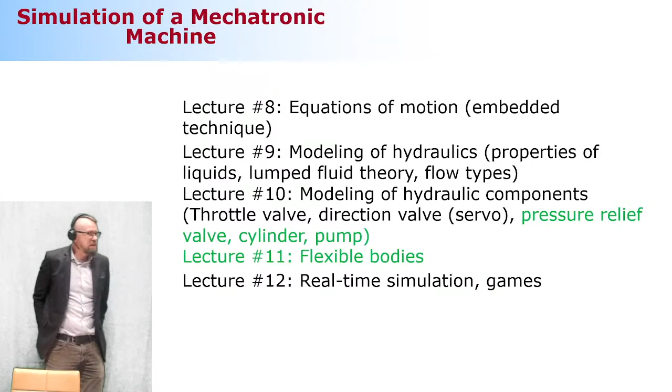I think it is pretty clear. Okay. So with that, we're gonna summarize what we discussed a week ago. A week ago, we learned that there are two different types of flows. The one that is dominating and most important for us is turbulent flow. In the case of turbulent flow, the particles are whirling. So they're not traveling in order through the orifices, but instead they introduce a certain level of chaotic behavior.

A behavior where they are rolling, not traveling back and forth, but circulating in a whirling way. Modeling-wise, the important observation regarding turbulent flow is the fact that the pressure difference and the flow rate are quadratically related. This is extremely important. There are certain parameters defining the relation between the pressure difference and the flow rate, but the pressure difference will be under the square root, meaning that's a quadratic relation. That's something important to keep in mind.

As soon as you see the characteristic curve and see that it behaves in a quadratic manner, you know that we're speaking about turbulent flow. Then the flow type that is not that common, but takes place every now and then, is laminar flow. In laminar flow, particles travel in good order, so they are not whirling. Laminar flow typically takes place when the pressure difference is small. Okay, what is small then? Roughly speaking, if the pressure difference is less than 2 bars... otherwise it's in most cases safe to assume that the flow type will be turbulent flow.

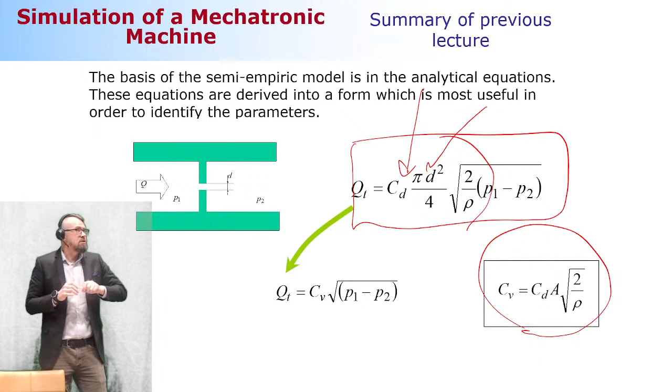The Cv is called the semi-empirical parameter, and you can get it directly from the manufacturer's catalog, because manufacturers offer characteristic curves telling the characteristics of each of the components they're selling. That's the idea. It's a combination of analytical expressions and measurements. But you do not conduct the measurements; the manufacturers will, or already did. That's the magic here, that's where the semi in semi-empirical comes from.

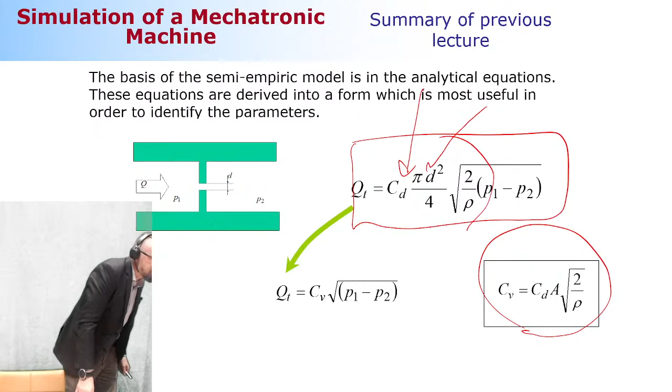Okay, that's what we learned a week ago, and we learned about the magnetically operated directional valve, a good example of how a valve component can be modeled. There are two steps. The first step is to model the spool position. If the spool is operated by a magnet, you can assume that the spool will follow the control signal, coming from the joystick or software or however you control your system, with a certain delay. To take this delay into account, you can use a simple first order delay equation, where the input signal is here, and this is the time constant, telling you how fast the spool can move from one location to another.

So we're cutting corners big time here, because we are not making the equation of motion for the spool. To do that, we would need to know the spool mass and all the forces imposed, including the flow forces, and so on. It becomes very complicated, so we don't do that. We make a simple assumption that the spool will follow the control signal with a certain delay, which is often the case for spools operated by a magnet. Okay, what then? Once we know the spool position, the next step is to model the flow through the valve.

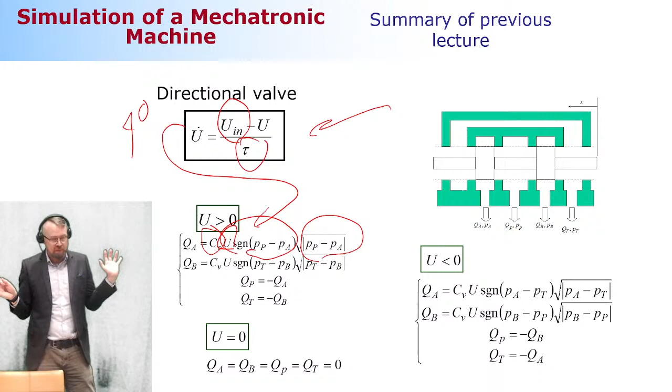Okay, and this is a scenario when the spool is moving in a positive direction. When it is in the middle position, it's assumed that everything is closed, which in real life will not be the case, because if the spool has a land like shown here, there will be a certain amount of leakage, and you will be seeing the leakage when you put this in a middle position, and then this is what happens when the spool is moving in the negative direction, so that direction.

Okay, then we learned about digital hydraulics. Digital hydraulics is a way to control the flow and pressures by using a large number of on-off valves. And the on-off valves are poppet valves, so they can only have two positions, fully closed or fully open. So it's not like a spool that can take any place you want inside of the spool housing. Now it's just on or off. And when you have a number of these on-off valves, you can get the same kind of features and even better than you can get from conventional valves.

Why? Well, it's mentioned that there is no leakage. That I can admit, there is no leakage, as is the case with conventional spool valves. They said that it can be more energy efficient. That needs some kind of clever control in a pump to make that happen, but yes, it's possible to achieve it. And what else did they mention? I think one drawback is that it's quite a bit of thinking, because to control this number of on-off valves, you need to make a clever control scheme.

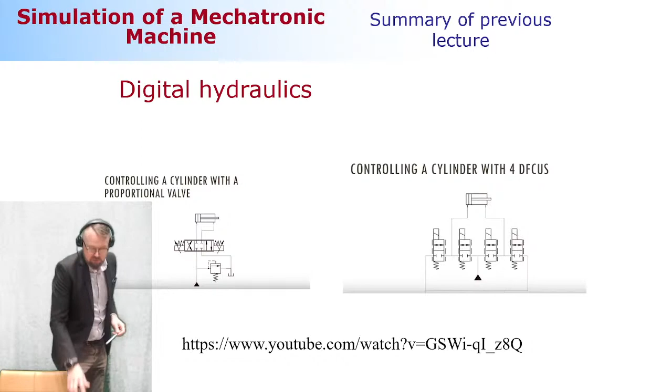Okay, so that's about the summary. We're gonna cut the corners here a little bit. So we're gonna forget about the pressure relief valve. I'm gonna give it as a reading assignment. This is gonna be available in the lecture notes. This is one of these bit more advanced components, but let me just give the highlights to you, and then we will move on. And we're gonna go to the next topic, which will be a cylinder, and the final component will be a pump.

Okay, you're still alive, right? Okay, very good. So why is it that you don't want to interact with me today? Because I look scary? Because of my new haircut? Okay, so let me tell you what happened. On Saturday, I went to the local barber shop, and we don't share a common language. I tried to explain to take just a little bit off, and he said, "Yeah, sure." And I came out like this. But he's a good friend of mine. We just don't have a common language. But other than that, it's good.

Okay. And what about my dress today? Why is it that I'm looking different than usual? Would you like to learn that too? So earlier today there was a former, well, he got his degree from this university already, I don't know, 35 years ago, and now he's a big shot officer in the industry. So he was making a visit, and I tried to please him as much as possible. So that's why I even put some effort into my hair and the way I look. Okay, so that's about it.

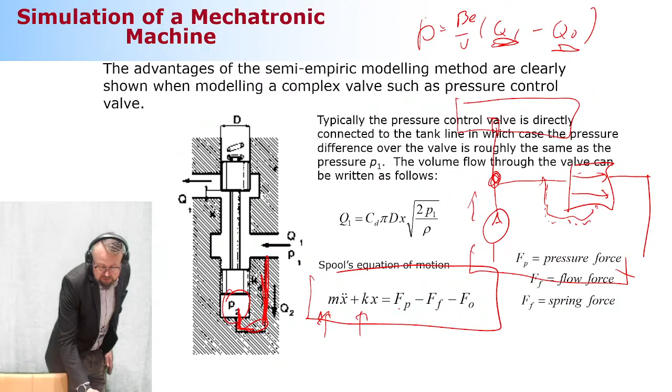But I was here, so I was explaining the equation of motion. The parameters needed here: you need to know the mass, spring, and many different forces. Once you know that, this is how the flow through the pressure relief valve goes. Now there's a lot of parameters - a big headache.

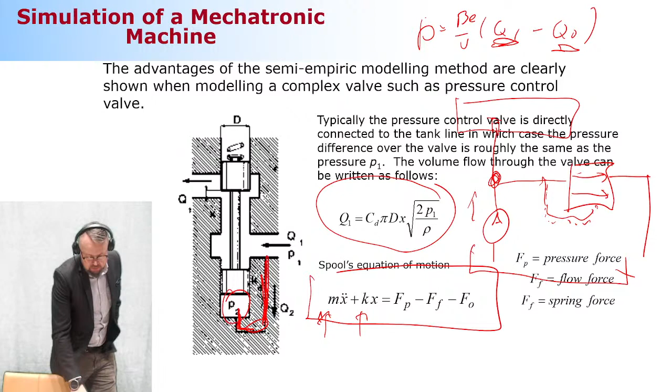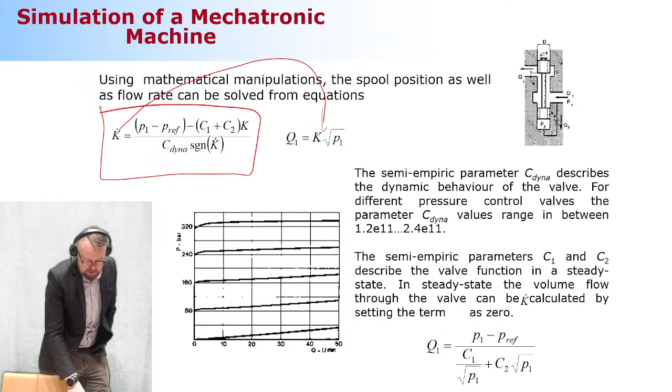How can you model a pressure relief valve? Details will not be shared here, so you can take a look at this using the lecture notes. I'm going to move on to the next topic, and that's a cylinder.

Very simple component - it's converting hydraulic pressure to mechanical force. To do that, this is a two-way cylinder, meaning it can be pressurized here in the piston side and here in the piston rod side. It works in a way that pressure applying here in the piston side will be multiplied by the corresponding cross-section area.

And that is minus the pressure that is fighting against it, because this pressure tries to press the cylinder in the left-hand direction. So there is going to be a pressure P2 multiplied by the corresponding cross-section area. That's going to be your force produced by the cylinder.

But there's one more component in this equation, and that's going to be a friction force. The friction force takes place because of the sealings that are used to make sure there's no flow going through this piston here, and no flow that takes or comes off from the cylinder.

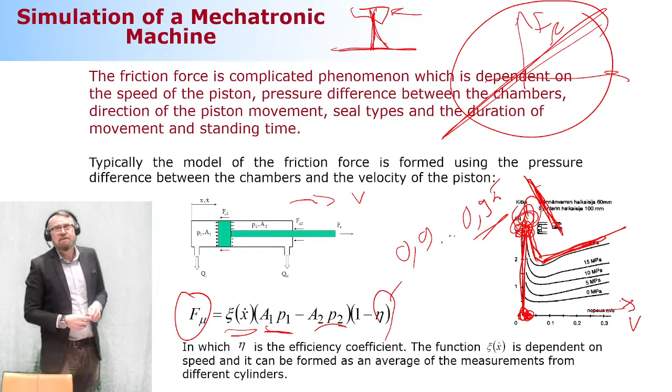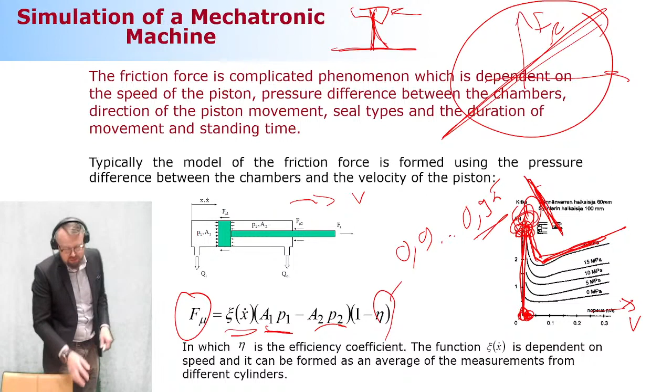But you knew this already. You knew it. All clear. Okay, why didn't you mention that you know this, or did you figure this out already a while ago? Okay, anyway, let's move on.

So pump will be the last component, and then there's going to be an example, and then we're done.

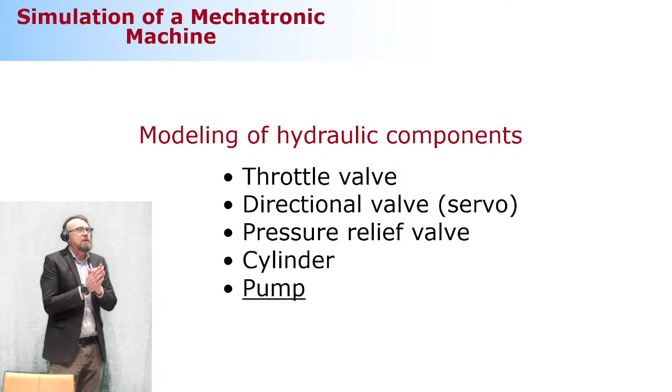Okay, the pump is a component that we assume produces flow rate. You know, flow and pressure is like chicken and egg—one will happen first. We make an assumption that the pump produces flow rate, and pressure, in turn, takes place if you're resisting the flow rate. But if you don't resist the flow rate, there will be no pressure. That's how it is.

And again, remember this equation? P dot equals effective bulk modulus divided by volume, times flow rate in minus flow rate out. Again, if in and out are not the same values, if you're resisting outgoing more than incoming, pressure starts to increase. That's the mechanism that is assumed to behave.

So what we're going to do when speaking about the pump is model the flow rate. That's it, nothing else. So it's the source of the flow rate, and resisting it gives you the pressure. That's the mechanism behind it. Now, again, we're going to use the semi-empirical approach like always, to figure out the parameters that otherwise would be difficult to get. Nothing else.

There are many different kinds of pumps, but pumps can be categorized into two big categories: fixed volume pumps and variable volume pumps. The difference is that fixed volume pumps keep producing flow rate no matter what—they have no understanding of whether or not the flow rate is needed. They just keep producing it, and they're used often because they're considered the most reliable type of pump. In certain industrial applications where there's no significant need to control, the fixed volume pump is a good choice. But more and more, the variable volume pump is being used.

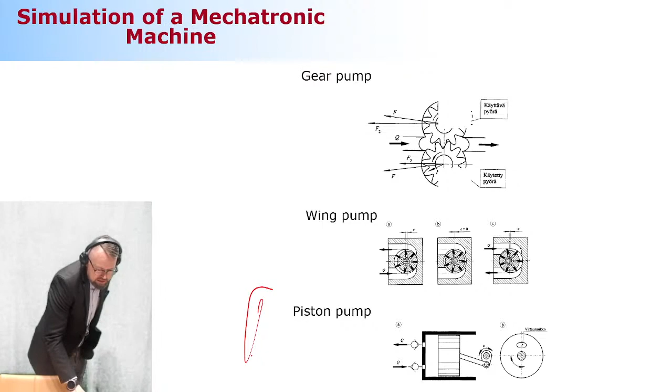I'm going to take a look at the comments from the chat window pretty soon. These are the different types of pump—piston pump may be the one most heavily used. Now, two categories like I mentioned: fixed volume pumps and variable volume pumps, and that's it.

First we'll take a look at fixed volume pumps. This is very, very simple, no serious thinking needed, because we're going to use this simple equation: power equals flow rate multiplied by pressure. Same as in electronics, kind of the same as electronics. Flow rate multiplied by pressure—that's your power.

Now, the pump is operated by a motor which has a limited amount of power, and this is the way to model the fixed volume pumps. The way we can do it is take this equation and take mechanical efficiency into account—how much of this mechanical energy can be converted into hydraulic energy.

That's the mechanical efficiency number. By taking that into account, that's your equation to define how much flow rate a fixed volume pump can produce. You simply take this Q, solve it from this equation, and take the efficiency factor into account. That's your equation, with one limitation: there's a mechanical maximum due to the construction of the pump that it can produce. Taking this geometrical limitation into account—this maximum flow rate it can produce—that's your equation.

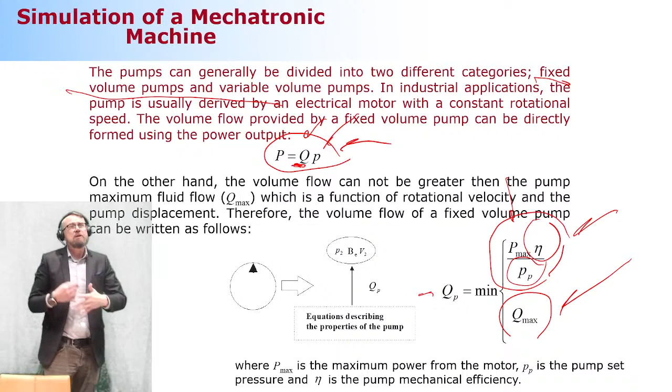So what do you do then? You substitute the information about how much is the maximum power that the motor running the pump can produce, and the pressure right after the pump. That's one term, then you compare it to the mechanical maximum, and select the one that gives the smaller value. That's it. This, as mentioned earlier, is typically connected to a pressure relief valve to make sure the pressure doesn't increase too much. That's a typical combination.

Variable volume pump. Remember, in the modeling of a pump, the pump is assumed to produce flow rate. Why do I say that? Because what you're going to see momentarily is in-class quiz. So pump is producing what? Flow rate. Okay, so it's a flow rate that it is producing.

Then variable volume pump, now things become a bit more complicated. We're going to use, in this semi-empirical modeling approach, a first order delay equation, or differential equation to be more specific. What I have in this first order differential equation is Q dot, which is not what I want, but I can solve for the one that I want, which is Q.

Now this Q is proportional to the pressure difference between what you wanted to have and what you have. If you have the pressure right after the pump, you don't need to produce any more flow rate. The flow rate that is currently produced is this, and this is how fast your pump can react to different situations.

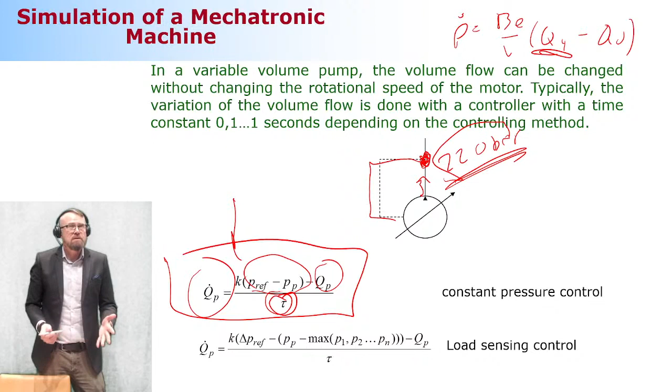Simple like that, because remember, this equation that I've written on each slide today: Q in, Q out. As soon as this reaches the set value, you do not produce any more flow rate to this control volume. You're adjusting the mechanical dimensions of your variable volume pump, and that will do the job for you. The parameters needed are this time constant and K, which you can get from the manufacturer's catalog. There's an example momentarily, and a detailed explanation in the lecture material too.

Load sensing pump. Have you heard about that? So you know how that works? Would you care to hear this one more time? Okay, so some of you know what's the deal with load sensing pumps, others have never heard of it. Or have you?

Okay, the load sensing pump is an extension of the variable volume pump. It too is a variable volume pump, so it can control itself to different scenarios, but in a more clever way than constant pressure control, because constant pressure, as the title says, just makes sure there is a constant pressure right off the pump, nothing else. But this is still energy-wise may not be the most clever way to behave, because sometimes you need quite a bit of reserve in your system, sometimes you don't.

What you really want to do is sense how much extra or reserve energy is needed in your system. You can measure that from actuators, and the typical actuator is a hydraulic cylinder. You take pilot lines, sensor signals right next to where the cylinder is operating, on the piston side and the piston rod side, checking what the pressures are at the given time in those locations. Then you adjust your pump based on that information. You take the highest pressure into account, and make sure that this highest pressure plus a predefined pressure difference, maybe 50 bars or something, will be in use. So when you need it, you have it, but you don't do it excessively, so you don't waste energy. That's the idea. It's very much used in mobile hydraulics.

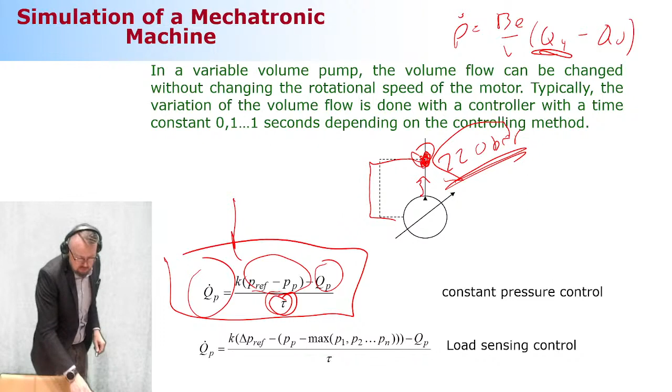How much did you understand from that explanation? Zero, right? Okay, so let me explain it using another kind of drawing and try again. There's also an outstanding YouTube video we'll take a look at momentarily.

Let's take a look at the video, and then I will explain a bit more.

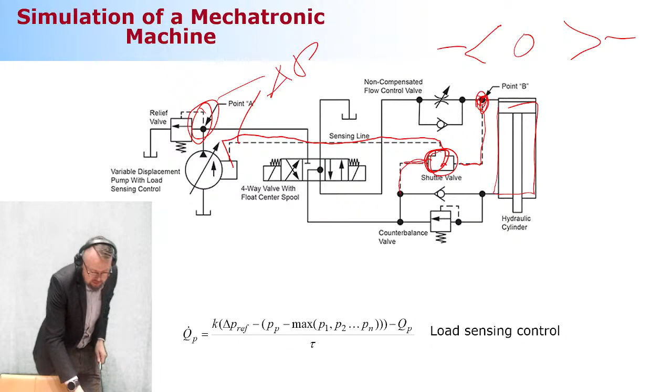Welcome to Lunchbox Sessions, bite-sized industrial training. Why this is not... Hey, it's Carl here from lunchboxsessions.com. It was okay. This will be a brief introduction to load sensing pumps, just a second, sometimes referred to as flow compensating.

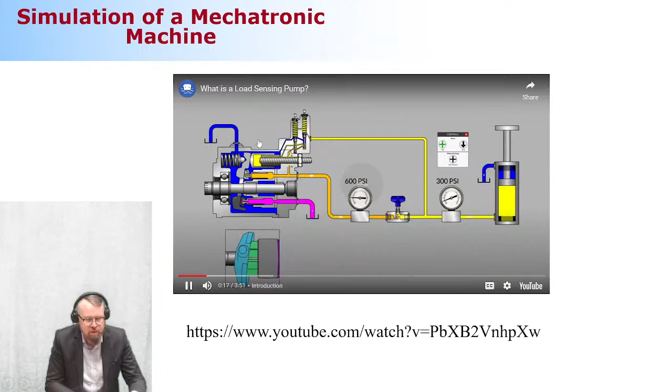Where this line goes now? Speakers. Should go to speakers.

Welcome to Lunchbox Sessions, bite-sized industrial training. Hey, it's Carl here from lunchboxsessions.com.

Big headache. Okay, this one. You see it now? What? You don't see it yet? You see it? You see it. Okay, let me just make this a bit bigger because I don't want to go back to the presentation mode anymore. Okay. Load sensing.

This will be a brief introduction to load sensing pumps, sometimes referred to as flow compensating. Our pump still has that very heavy spring, that major adjustment called the pressure compensator or the pressure cutoff for when we hit that really high top end pressure to make sure our system is protected. But it also has a weaker spring called the load sensing adjustment or the flow compensator.

And that flow compensator is receiving information, feedback if you will, coming directly from the load, our cylinder, which right now is working at 300 psi. That's the pressure it takes to lift the cylinder and rod. And that 300 psi is being fed back to the controller and giving that spring a boost. I could tell that the spring is actually set to 300 psi. How did I figure that out?

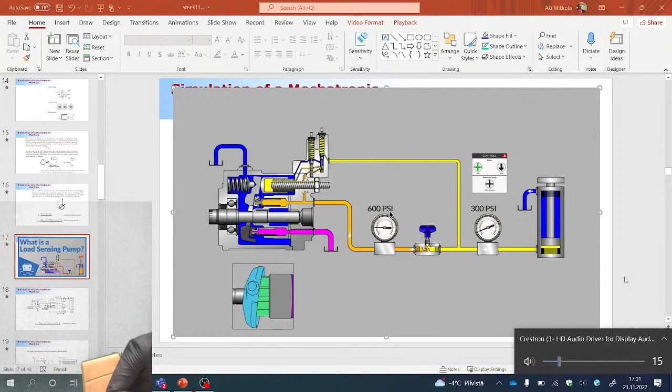I figured that out because our pump outlet pressure is set at 600. So it's taking 300 from the load and adding it to the 300 spring setting, and those two forces add together to give us our regulated pump outlet pressure of 600 psi. This is different from a pressure compensated pump, which might be set at, say, 2000 psi at all times, and therefore using a lot more input energy.

So in this particular case, we've got a pump that sets its outlet pressure just slightly higher than what's needed by the load. We've got to have some kind of a flow controlling device in there. This is our needle valve that's being used to set our desired cylinder stroke speed. But let's have a look at what happens when I add a brick to the brick stacker.

Our load pressure has gone up to 600. But what happened to our pump outlet pressure? Somehow it automatically adjusted from 600 up to 900. What we're finding out is that we're always maintaining a 300 psi pressure differential, sometimes referred to as a 300 psi margin pressure when we're referring to load sense systems.

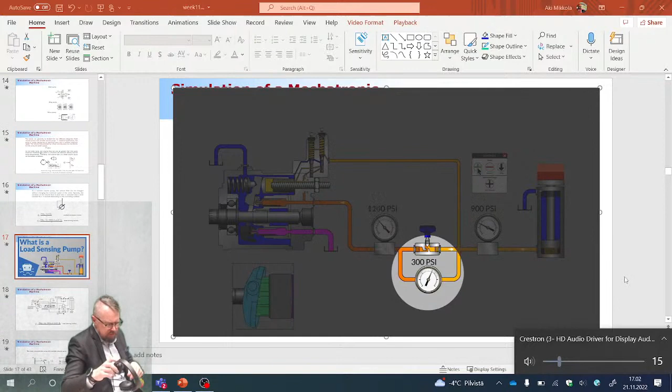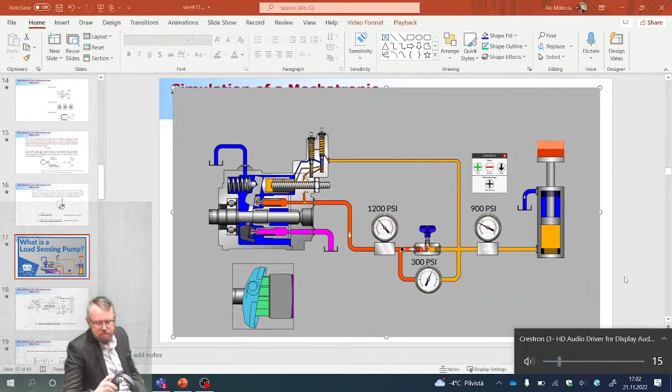Let's add one more brick, and this time watch the delta P gauge. The delta P gauge fluctuates for a brief fraction of a second, but quickly we find it returns to 300 psi, and we never really noticed any change in speed at the cylinder. The cylinder just kept moving nice and steady, and our pump found out that it needed to increase the outlet pressure setting automatically.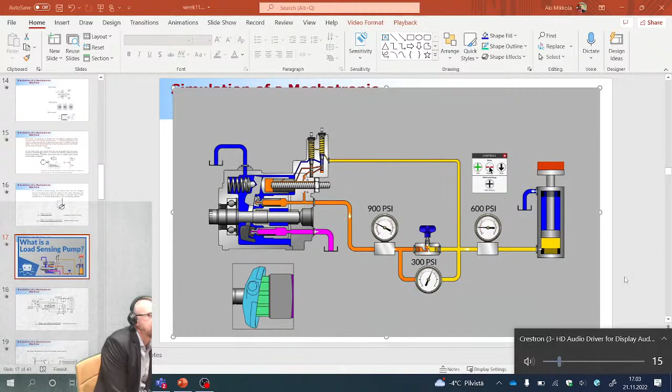So what we found out is we can have a pump that is set at a pressure that's just a little higher than what's needed at the load, instead of being always at the pressure cutoff pressure, which could be considerably higher. And because we want steady speeds to our hydraulic cylinder, we don't wish to see any fluctuation in speed. Every time we take a brick off the stack, or add a brick to the stack, the pump knows to adjust itself accordingly so that the flow rate through the needle valve doesn't change. That's the nature of a load sense system. And that's a brief introduction to load sense pumps.

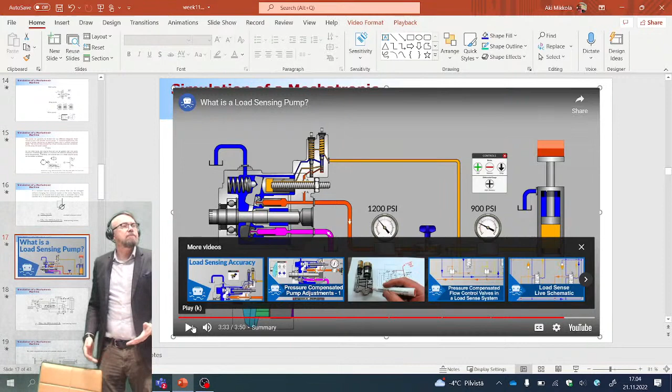Clear, pretty clear. Okay, and I got the comment from an online participant that I used incorrect terminology, because I think at some point I say fixed flow, so it's a fixed displacement, and that's what it is. So fixed displacement, because the displacement, the mechanical dimensions are unable to change. All right, thank you very much for that.

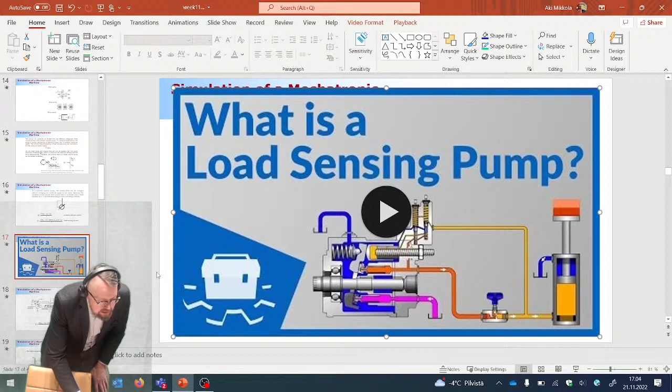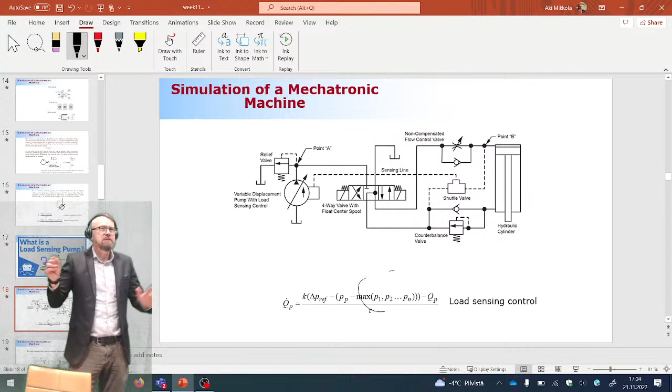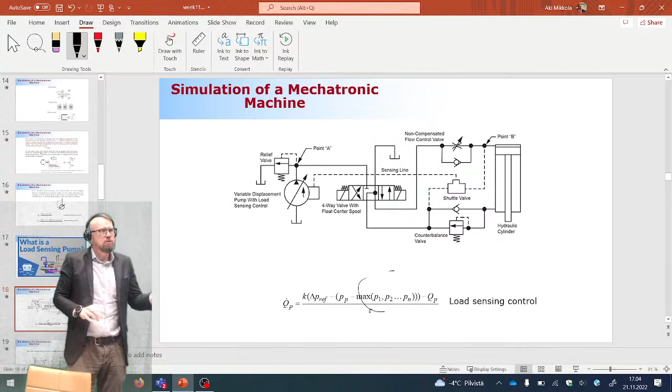And now comes the next challenge, and let's see how well it works. I think that I will go like this, because this is what we discussed already. So in load sensing, you can have more than just one actuator you're monitoring. And based on that, there is one cylinder that is asking for the bigger margin, that's what this guy was calling margin pressure. You are controlling your pump based on that. So it's always the highest pressure that is used to control the load sensing pump.

The key parameter can be obtained from the manufacturer's catalog, like it is shown here. So these are one of the important features that are offered by a manufacturer. But my first in-class quiz is coming right next. So in hydraulic modeling, a pump is assumed to produce what? Pressure for a hydraulic circuit, oil flow for a hydraulic circuit, temperature for a hydraulic circuit, voltage to an electrical circuit.

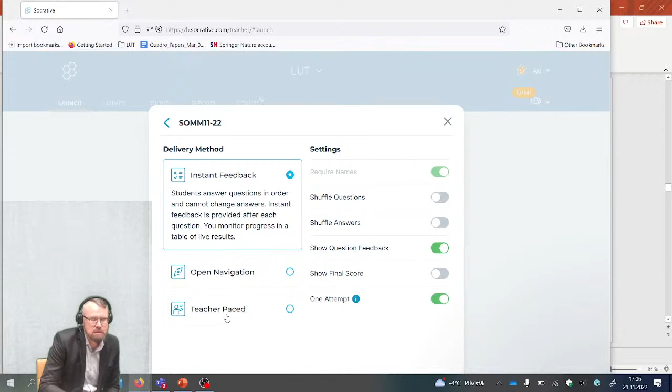And not yet, so it's not yet on, but let me, sorry, I haven't logged into Socrative, so it's going to take me a couple seconds to do so. So you guys want to have a break, or you will take a break no matter what. Okay, so let me launch. They have a different visual interface than usual. Okay, so here it is.

So in hydraulic modeling, a pump is assumed to produce what? Pressure, flow, temperature, voltage. Those are the options. And then what follows is that I'm going to spend a little bit of time to introduce one example related to hydraulic circuit modeling. And once I'm done with this example, then we're going to discuss how to describe mechanical deformation in multi-body applications.

Room name is not mentioned. The room is LUT, as usual. Oh, the Socrative link. I don't know how you can get the link. I guess you just type Socrative into Google and it will take you to Socrative. Okay. What else? Yeah, there was one more comment about digital hydraulics, that more components, less reliable. I mean that you have more problems. Yeah, could be, could be. Okay, so let me take a look. Oh, we got 44 answers so far, so I'm hoping we're going to get more than that, up to 60 something, that I think is roughly the number that will make me happy today. But we'll see. Oh, 50 answers already, and the number is increasing.

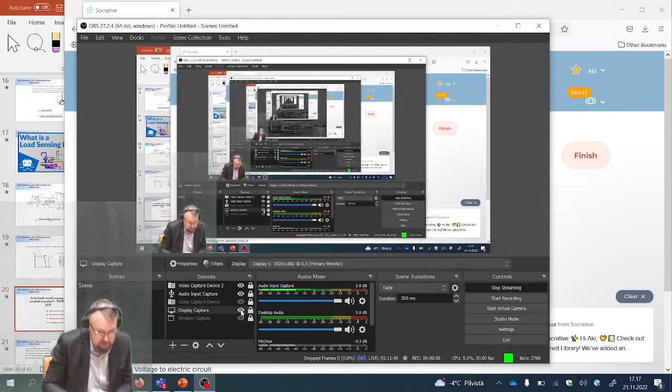So where is it? Here and this one. How is that? Okay, so here's a little bit of sad news. So we only have here 57 students, but how is going to be the success rate? So game is on. 100? No, I would say 50. 50. 70. Well, it could be 72, but my guess is 50. So 50. So what are the others saying?

So the numbers are coming, and the numbers are like 87, 98. That's a big number. 99. 99. What about 100? So why not 100 then? It could be 100 too. Okay, so now they finally came to 100. So let me close in 5, 4. Yeah, I'm not gonna do this counting because last time I did the counting, you guys scored 100%, and that was a big, major disappointment to me. So it wasn't even a very close case.

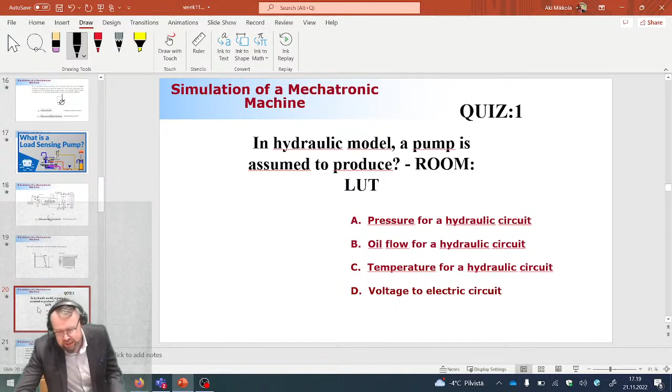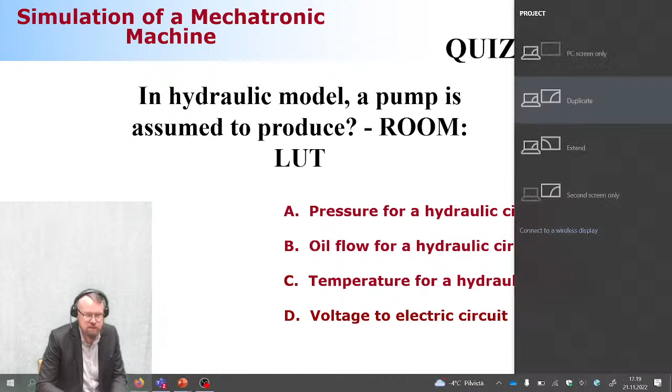So oil flow is the one that it is producing, not the pressure. This is a modeling agreement we made. You cannot see. Sorry about that. Okay, so online participants, they can tell you that the success rate was at 86. 86. Now let me check. Now it went in the wrong order again. So I need to do this and then this. Okay, and then one more thing, which is this. Duplicate.

All right, so here comes the example that I mentioned. And in this example, there's going to be another in-class quiz, so the second in-class quiz will come momentarily. So I have here a very simple hydraulic circuit. It consists of a cylinder, this guy here, a direction valve, and then the pressure source and the tank. And the direction valve is connected via a throttle valve, so there's one component here, to the piston side of the cylinder, and then the piston rod side is connected to the valve as well. So this is how it is.

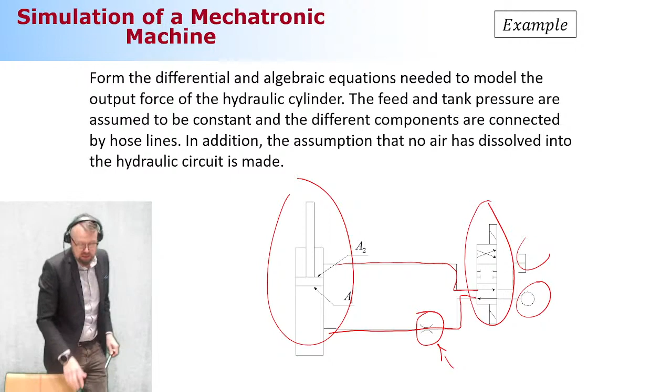So let's create the equations needed to model this kind of hydraulic circuit. First things first. The first and most important step is that you need to make decisions about how you are discretizing your hydraulic circuit. Where are the places you need to compute the pressure? So it's all about where you can assume the pressure to be equally distributed. All right? Hose lines. We make an assumption that within the hose lines the pressure is equally distributed because we will not take the pressure waves into account.

So meaning that there is a hose connecting the direction valve to the throttle valve. In this hose line, there's one single pressure we're computing, and that's it. Then this throttle will introduce a pressure drop, and because of that, I need to make another computation right after it. But now I can assume that the pressure right after the throttle valve will be the same as the pressure next to the piston. On my way back, I will take my connection, the volume in the piston rod side. This is connected to the valve, and that's it. Just the one volume needed.

One more very important decision you need to make, and this is the decision about the positive flow rate directions. You can do that any way you want, but it's highly recommended you do a drawing for it. And once you have a drawing, you can be consistent. If you keep something in your mind, it can get disturbed, and because it can get disturbed, you can so easily make a sign mistake. But once you have put it in writing or in a drawing, as shown here, then you do not make this mistake so easily. You need to do it because you need to know what direction you are assuming to be incoming and what direction you assume to be outgoing.

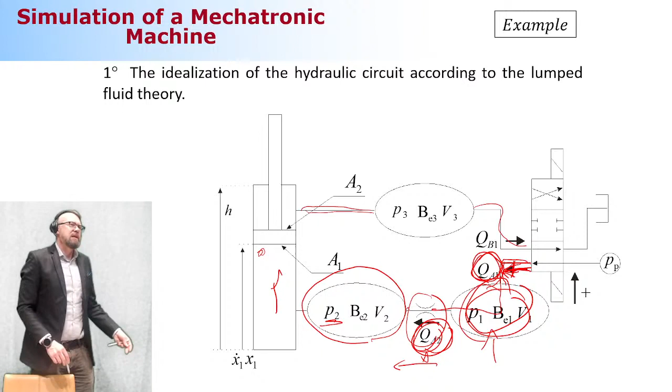Here, obviously, this is incoming, this is outgoing, with respect to this volume here. Whereas in this volume here, this is in turn incoming, and the direction here is outgoing. That's what defines what sign you need to use. One more time. So here, there's a lot of drawings. Here, this flow rate is incoming because I'm making the assumption that the positive direction is from right to left. This is outgoing because it's assumed to be the same direction as the previous flow rate. You can make it differently. It doesn't matter how you do it, but you need to be consistent because with neighboring volumes, if you make mistakes, the pressure will unrealistically start to increase and never come back. It will go sky high or it will drop to the minus, and again, it will never come back.

Okay, that was step number one, the most important. The rest is mechanical, simple. So you create the equations for the volume sizes. The first volume is just a hose line, nothing else. The second is a hose line plus whatever the piston is traveling with respect to the bottom of the cylinder. The third one, hose line, and then you take the piston rod side volume into account. Very simple.

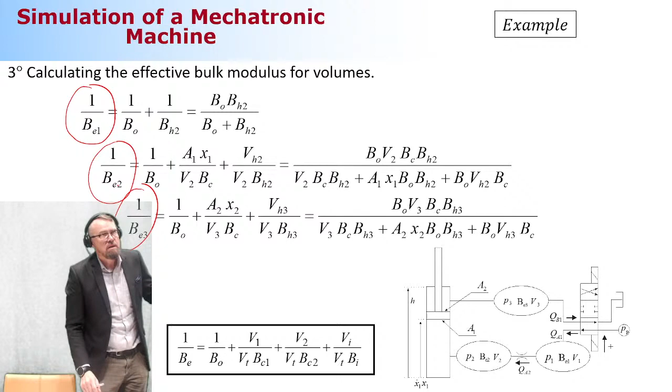Then effective bulk modulus for each of these volumes. So you need to compute a total of 3 different effective bulk moduli. So that's how you can do it. I'm not going to go into the details. It's another mechanical thing you can do. You can do it.

Then pressures. Here is the second most important thing. So you're creating the differential equation to compute the pressures for these 3 volumes, because you have 3 volumes in your system. Okay, the first one, we will get back to that soon. Second one, this is assumed to be incoming. So it needs to be positive in sign as it is shown here.

Motion in the right direction is taking volume away from the control volume. So it needs to be minus in sign. When the piston is moving this direction, that's a positive direction. When that happens, it compresses flow here. So it can be considered as a positive flow rate to my control volume 3. Whereas the flow rate, which is shown here, is leaving. That must be negative. Okay. You got the concept. You got the plus and minuses, how it goes.

You need to do something. You need to do this or you need to do that. You sure? Because your head is doing this, but your face and your eyes are doing that. So it's clear?

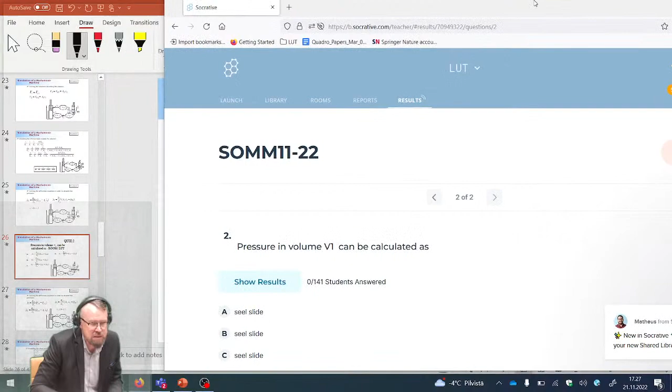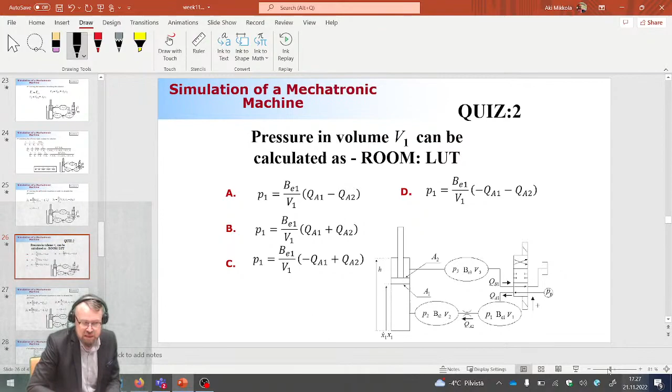So momentarily you will see, okay, where is my browser here? So let me take myself to the next question. And we only have 2 in-class quizzes today. So now I need to go back here because otherwise you will not see it. Okay, just a second. Not yet. Okay. Would you like to get my consultation or you're okay? If you wanted to discuss with me, I'll be happy to do so. And I will be willing to step off from the camera too, and willing to mute myself. So what is the correct one? I got some comments from online participants. And the game is on. What is the success rate here? You guys need some more time, or are we okay to continue?

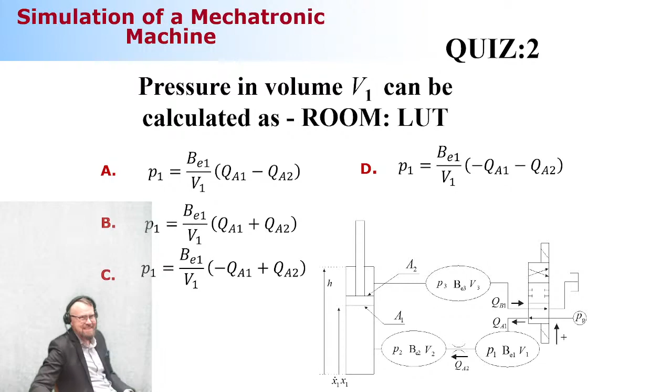Okay, now there is a question. There's cases about the success rate like 110%, 100%, 93%. I would say the 93 would be more close to reality rather than 100%, because 100% is not going to happen. It happened. I know that too well. Okay, so can I go? Okay, so I'm going to skip that because the right answer was visible, so I'm going to go back to that slide.

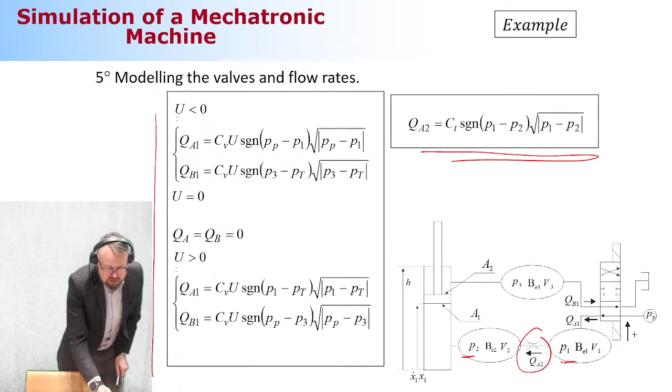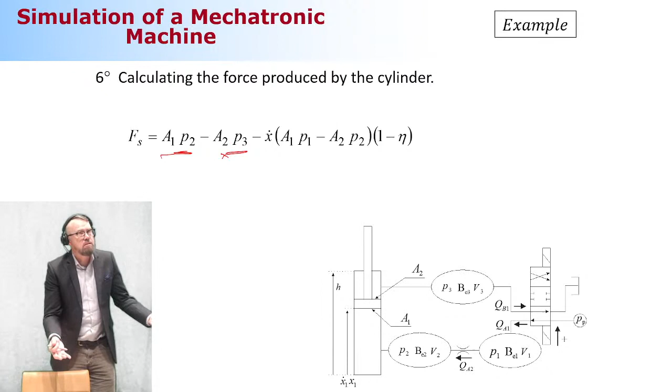Modeling the valves and the flow rates, that's going to be my next task. So we have 1 directional valve and 1 throttle valve. Each of these valve components we have discussed earlier. So this one here you can compute when you know this pressure and this pressure, using this simple semi-empirical equation. And the valve position, you first describe the valve position, and once you know it, you're using these semi-empirical models to describe the flow rate. And then finally, the force produced by the cylinder. So once you know P1, P2 and P3, that's all you need to know. And that's about the hydraulics.

Next, I think 20 minutes, I'm going to spend to give you a short introduction to flexible bodies. Why? Because a couple of years back, we professors received a letter from the student union. The union was unhappy that professors are not explaining enough what exactly they do in their research, and they were hoping that students will get more involved with the research we do. So you asked this. It wasn't me, so it was you. So now, to make the student union more pleased, I'm going to tell you a little bit about how we can model flexible bodies in a multibody framework. And we'll see how much you're going to like it. This will be the subject matter that we will revisit in a course entitled Simulation Laboratory Course, which, by the way, is the best course in this university.

Guess who is a lecturer? Correct. So it's going to be me. And I enjoy that course big time because it's more laid back than this one. It's not as tightly scheduled as this one. This is an unpleasant course in the sense that we're a little bit in a hurry all the time. So I'm unable to tell my stories about this and that, which you may not like so much, but I like it big time. All right. So it's the best course in my mind, if I can clarify the situation a little bit. All right.

Okay. And then they're saying flexible body, so that's dancing me. Yeah, it's not going to be dancing me because I'm not that flexible. But let me take myself back to, you don't see it now, but soon you will. Duplicate. Is it coming? Yeah, there it is.

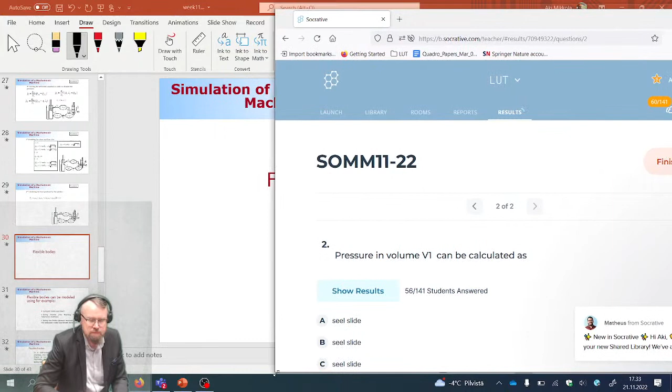Okay, I want to show you this success rate. The success rate of this particular question now is going kind of a weird way. Okay. Where is this? Oh, there. Okay, 84. It's good. It's really, really good. And let me take myself back to that. So this was the question I was asking: what is coming in and what is leaving? So obviously, this one is the correct answer.

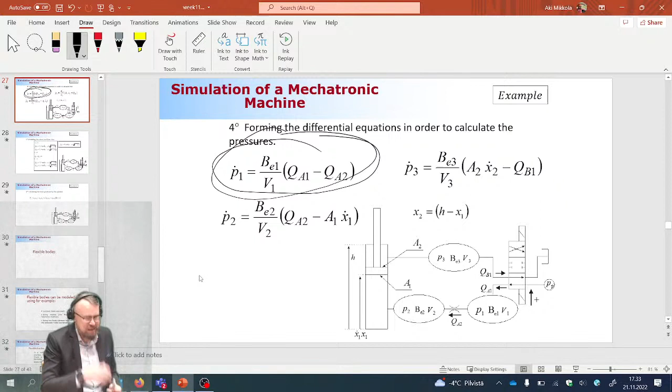Okay. Anyways, back to the flexible bodies. As we're kind of running out of time, I might continue a little bit about the flexible bodies next week, Monday. But the flexible bodies, if you take a look at the publications made by my team at LUT University, really many of them are related to how to describe mechanical deformation in multi-body applications. So the research is related to a method called the finite element method. Are you guys familiar with that? Okay, that's what we do. That's a good part of our daily dealing.

We also do real-time simulation, deformable ground modeling. We're combining artificial intelligence with simulation and many other things. But the main body of our publications is related to how to describe deformable bodies. And I will give you a short introduction to that subject matter. We are not going to step into equations, but if you want to torture yourself, penalize yourself, this will be a great way to do so. You just print out the papers we have made and read them, and it hurts physically because the way things are explained is not so easy to follow.

Anyways, I'm going to explain to you three different methods, and each of them has certain advantages and disadvantages. They can be used to describe deformable bodies. Now, when you're describing deformable bodies in a multi-body framework, you end up with a finite element procedure which is capable of describing nonlinearities. And that's a big challenge, because I'm sure you have used the finite element method, but the linear finite element method. What we have developed are methods capable of capturing large deformations and large rotations. That combination is a big problem computationally. Anyway, this is a long story, but today is just a highlight.

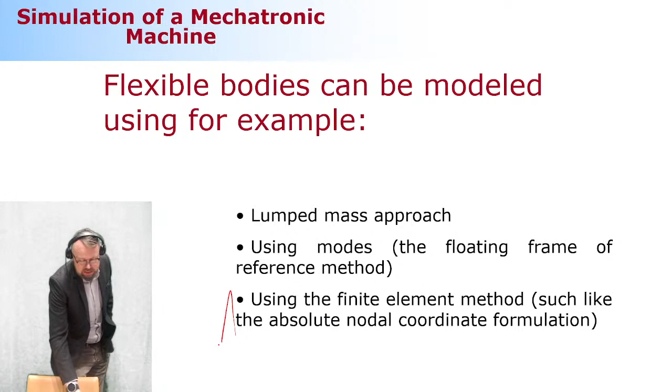And then the method we're doing an awful lot of developments on is the absolute nodal coordinate formulation. Okay, I'm going to skip this explanation. I think I mentioned this to you. Every single component in real life is not rigid. There is no such thing as rigid bodies. But is mechanical deformation significant enough that it needs to be accounted for in dynamic simulation? This is hard to answer. Sometimes it is so significant that you cannot assume your model to be rigid, but you have to take the mechanical deformation into account.

When you need to do it, that's, like I say, very complicated questions. I could give you some rule of thumb, but generally speaking, that's a big challenge to know when it needs to be made flexible to get accurate results.

But anyways, flexible, how the body deforms, can be defined into two different big categories: linear deformation and nonlinear deformation. Depending which one is your case, or more properly speaking, small deformation and large deformation. It's all about how the relation between the strain and displacement is defined.

What is displacement? Let's get started from that. The displacement is how far off you take your body from the original undeformed configuration. So if I have a cantilever beam, and I deform the cantilever beam like this much, at the end of my beam I'll have displacement that is defined by u. Displacement is a function of the length of the body, because u is going to be different here in the middle than at the end.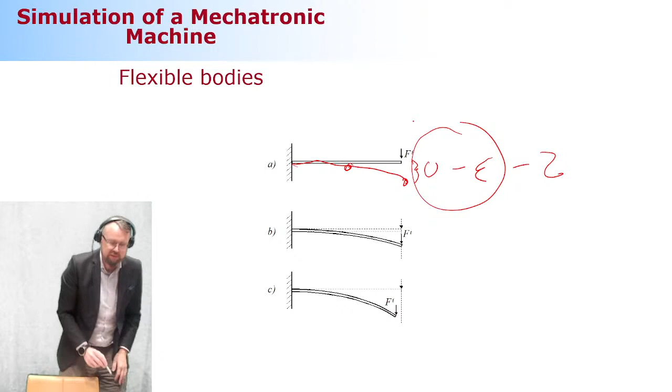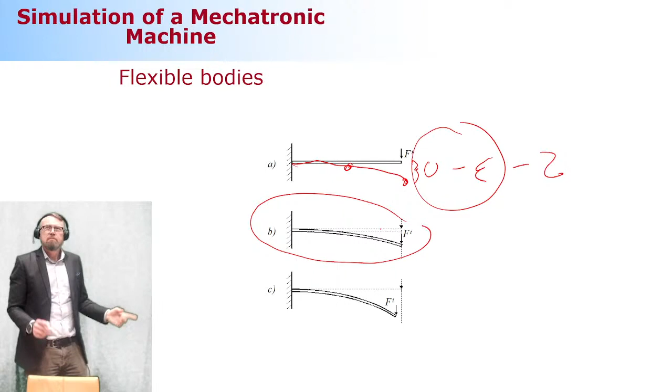If this is a linear relation, which is very common when you have a small deformation, it comes with consequences which are easily visible when you look at the cantilever beam. Because in a cantilever beam, when you're loading the free end, it will deform as shown in this picture. Looks natural. But there's one major assumption here.

And the assumption is that deformation in the axial direction is not accounted for. And that becomes unnatural.

If you're increasing the force, if you keep on pressing the cantilever beam, it will deform in a way, let me make this drawing here. If it's originally here, this is where you're pressing it. It will deform like this. It will stay in this loading line.

And that's not going to happen in real life. That's not going to happen because in real life, when you have a large deformation, it will deform like this. And there's going to be displacement in the axial direction too. This is called geometrical nonlinearity, because this deformation affects the axial displacement as well.

Okay, this is very common in real life. You can see that in many applications. What is not very common in real life is this material nonlinearity. This is the stress-strain relation.

You know how steel material behaves. They behave in a way, let me see if this is clear. So if this is strain, this is stress. Most of the cases, they behave linearly. Meaning that if you're loading this cantilever beam, this relation is linear. And when you take the force off, it comes back exactly where you started from, to the undeformed configuration.

Where do you need it? Well, let me give you a couple examples. I'm going to get back to this, but you need it in certain very complicated components like belts, cables, wire ropes, helicopter blades. Those are the cases where you need to take this into account. And here's a development where LUT University is heavily involved.

So remember, multi-body dynamics started already 40 years ago, and it started from assuming that every single body was rigid. It soon became clear that this assumption is not good because there are cases where mechanical deformation is significant enough that it affects the performance.

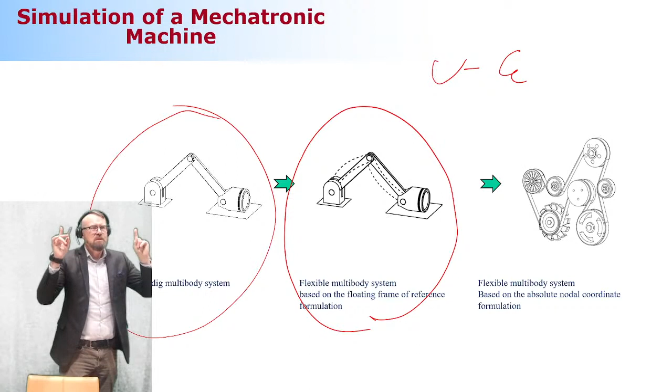And when you do the assumption with rigid bodies, your simulation responses are incorrect. So to increase the accuracy of the models, there is a method to describe this deformation, assuming that the stress-strain relation was linear. You can do a lot with that. But the final step, which is at the moment somewhat available, is that you can model even the belts, something where this relation is nonlinear.

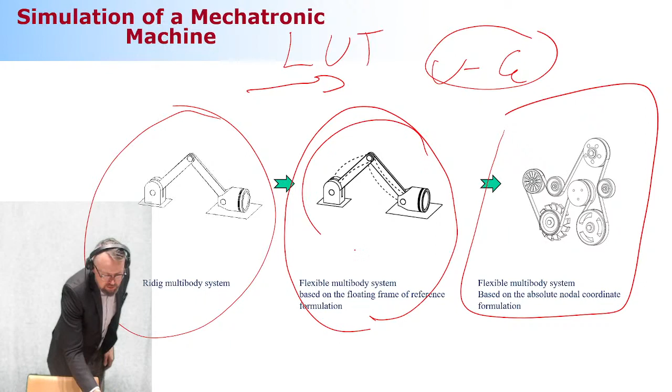So LUT started contributing about this, particularly to this area. Now I hope the student union is getting happy, but there's going to be a much deeper story than that, because I would like to go with a certain level of mathematics here.

Okay, so I'm going to explain one method, and the rest I will leave for next week. This method takes me back to my childhood, teenage years, or when I was a doctoral student, let's put it this way.

At the time, it was a method called the lumped mass approach, a very valid one. It's a simple concept because it's based on taking your original beam-like body and modeling it using a number of rigid bodies. So the original body was replaced by a number of bodies, connected together via spring elements.

Spring elements introduce spring coefficients to each of the 6 directions or degrees of freedom, and it makes it behave as a deformable body, even though it was a collection of rigid bodies.

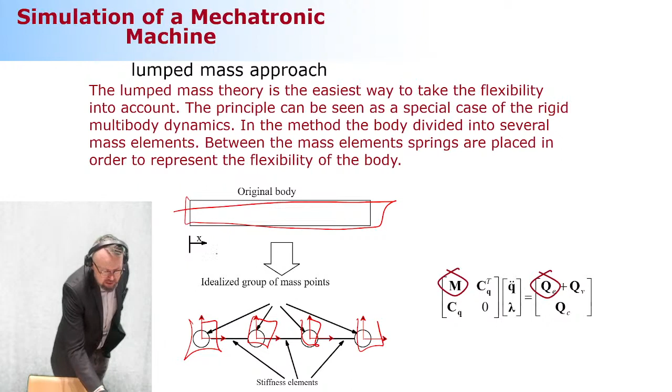This was an okay method, but remember what I mentioned about numerically stiff problems. This is a good example of what can easily lead to numerical difficulties. If you think about this beam-like body and the deformation associated with bending motion, it's usually associated with a somewhat low frequency, 50 hertz or so. But if you think about axial deformation, compressing the beam, that frequency is very high—it can easily be 2000 hertz if bending is 50 hertz. And here is your problem.

So you have high frequencies and low frequencies, and this is something integrators usually suffer with, because they recognize this high frequency and look at it very accurately. When they look at this high frequency very accurately, they adjust their time step to make sure they can recognize it. It doesn't make much difference in practice, but they tune themselves to look at this minor thing, and that's what slows down the computation.

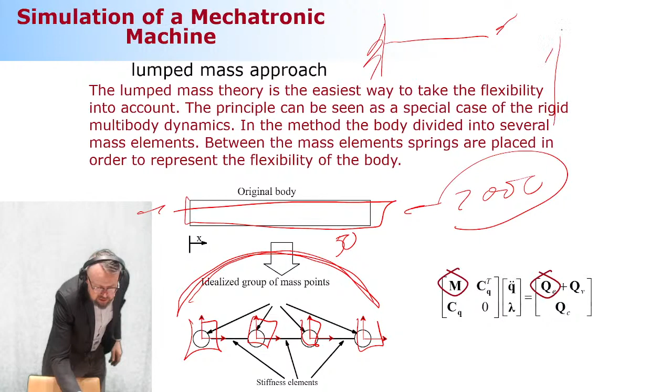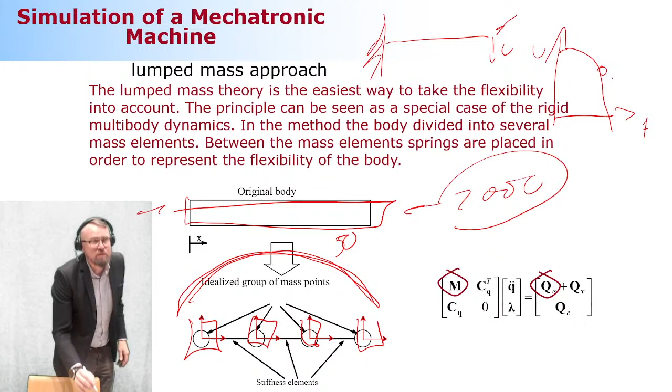It's like you have this cantilever beam, you press it like this, so there's going to be axial deformation and bending. When you look at the response, time-wise, it will look like this—this is time, this is displacement. But when you magnify this curve and take a close look, you will see there is a small vibration like this, and integrators immediately detect: hey, there's a high frequency, I want to take a close look at that. And that's what they do.

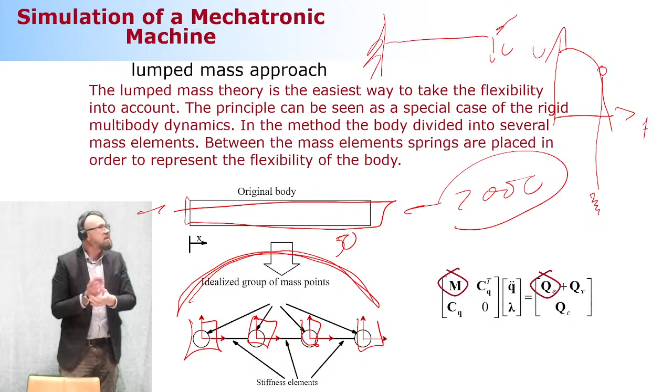But how much difference does it make? Not much. Okay, so that's the first method, and the second one, this is how it behaves. There are a few examples we're going to take a look at, to see what is good and what is bad about it.

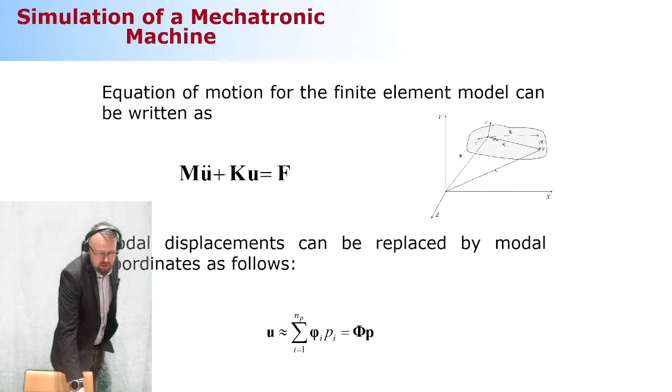On Monday, we will continue about the floating frame of reference formulation, and I will show you some exciting things related to that method—how we can model bones and stuff—and how we can use the absolute nodal coordinate formulation. So, some super exotic things.

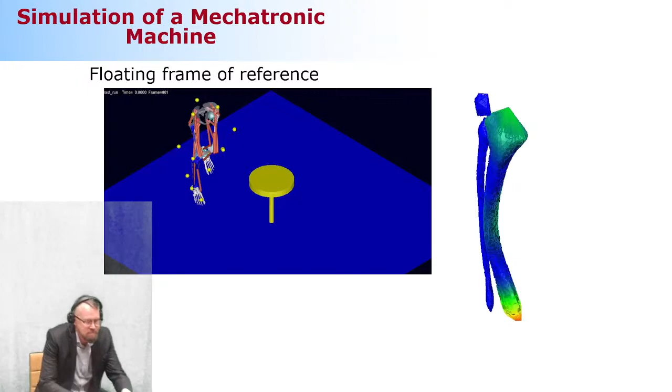Hold on, I'm going to...